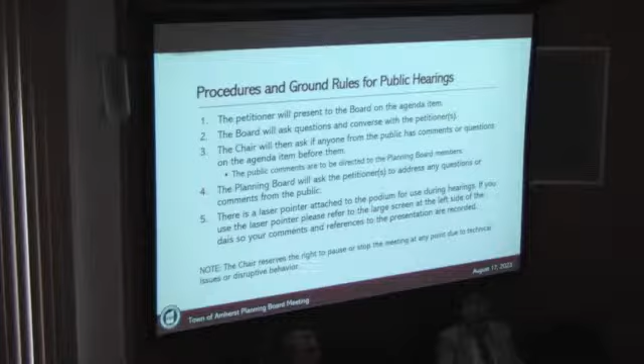I'll make one other comment. Apparently in a local newspaper a few weeks ago, there was a comment made that we had recommended a particular project. That was an incorrect statement. I believe they retracted it, probably on page 27 somewhere. That was not the truth—we have not recommended anything at this point for Costco. So just so everyone knows, that statement was incorrect.

That being said, we will go to item number 1. The first one is a site plan review for a proposed Tier 3 solar energy system, property located at 800 and 850 New Road. The petitioner, please.

Thank you for having us tonight. My name is Lee McIntyre, and I'm a project developer with SolSource Power. We've met before on a rezoning on this property. I'm going to go through a few points about the company and the project, and I'll shortly be joined by Mark Kenward, who you've also met, who's running a little behind.

SolSource is a New York-based company. We're female and veteran-owned, based out of Troy, New York. We develop solar farms all across New York, including community solar farms. I got my start in solar in 2014, I've lived in New York most of my life, and I work on projects across the state.

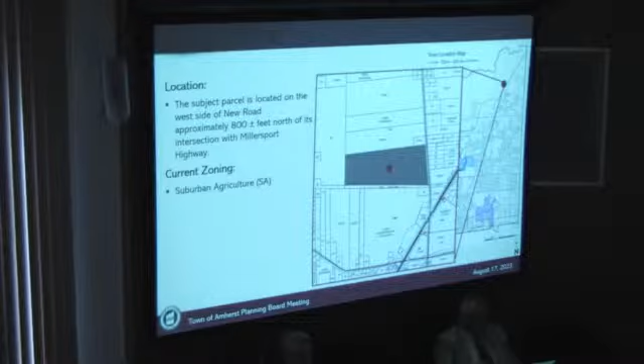This will be located on the west side of New Road across two parcels that will be merged. 850 and 800 New Road will be merged to accommodate about 30 acres of solar. We can go to the next slide.

There's no existing development on this site—it is vacant land. We provided the planning department with a tree survey on site, which showed that much of the trees on the site are dead or dying. They pose a risk to the solar, potentially falling on the panels or injuring people during construction of the array. So there are areas of the property where we do plan to remove trees.

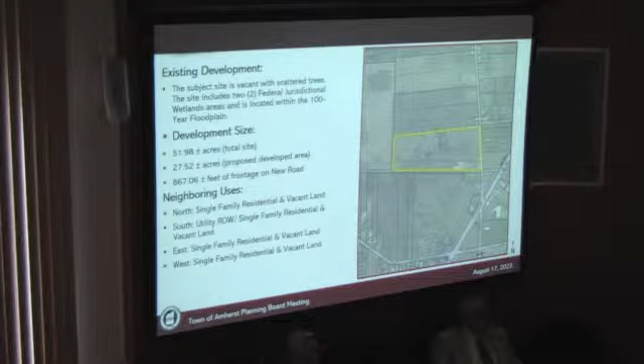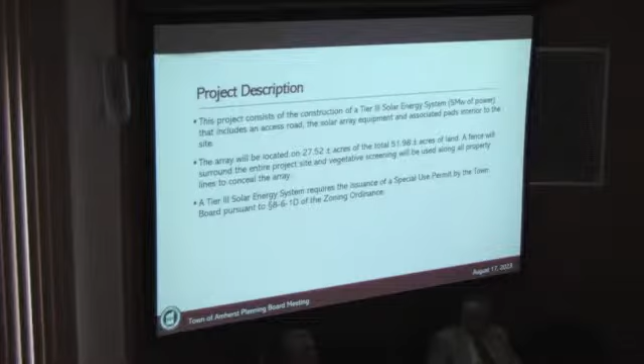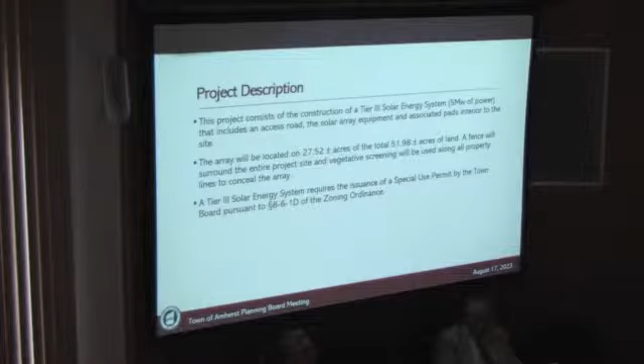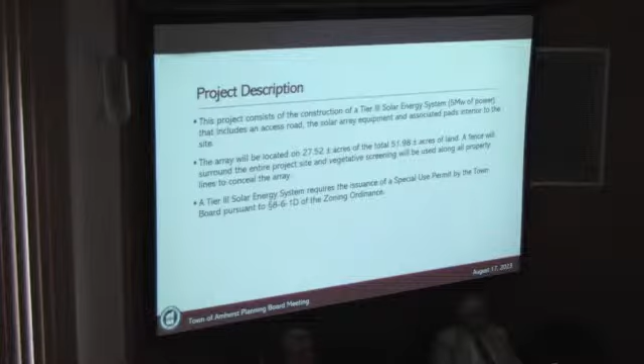So the project array is on just under 30 acres of solar. This is not productive farmland. We do plan to fence the entire array in for safety, and we also plan to lean into the agrivoltaic development of this project. What I mean by that is using the property for farming the sun, while also leaning into the agricultural importance of the property. So we plan to use sheep grazing to take care of the vegetation on site throughout the year. We are working with local sheep farmers, and there's actually an initiative across New York State to work with sheep farmers for this. There currently aren't enough sheep in New York to meet the demand of solar arrays, so they're currently working on breeding enough to meet that demand, but that is our intention to accommodate the co-location of agriculture on this property.

You can see there is a wetland in the middle of the site. The wetland is under the jurisdiction of the U.S. Army Corps. We plan to build around the wetland for the solar array to limit impacts on it.

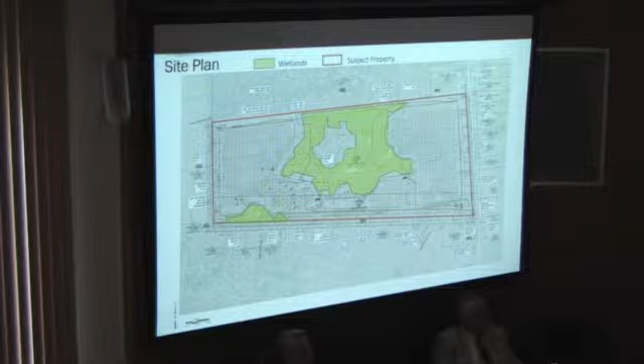This is a depiction of the property. At the front, there will be landscaping to block the view to the solar array. We worked with a local landscape architect on that, and we've submitted comments and worked with the planning department pretty extensively on those landscaping plans to really limit the visual impact of the solar array on New Road.

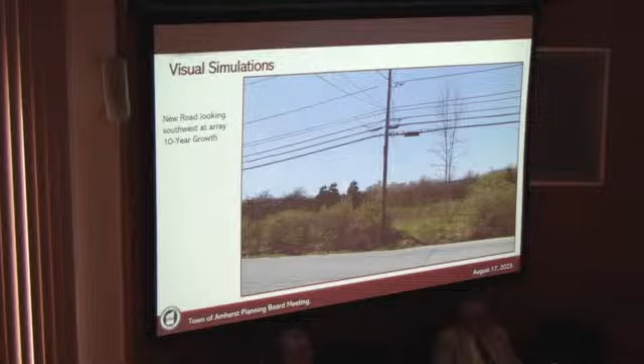We do plan to cut some growth on the property, but we plan to replace it with healthy growth. I think what you'll see in the tree study that was submitted is that there's a lot of unhealthy growth on the property that doesn't stand to last the test of time. A lot of the trees are expected to fall because they are not living. They also have a really low root system, and we do plan to replace those with the landscaping.

I'd like to welcome any questions from the planning board that I can answer.

There's someone who brought up that they had a concern because they will be living close to the solar farm, concerned about the kind of exposure that they and their families would have. Absolutely, that's a common question we get. The infrastructure we're using for this solar farm is the same electrical infrastructure used along the road currently, a 13 kilovolt line. That's the same service you get to any of the businesses across Amherst. There are some studies out there and potentially some evidence for higher voltage lines causing health effects. I don't know if those have been validated, but these are low voltage lines and not similar to that. So in terms of the electricity, there are no known health effects from this level of solar.

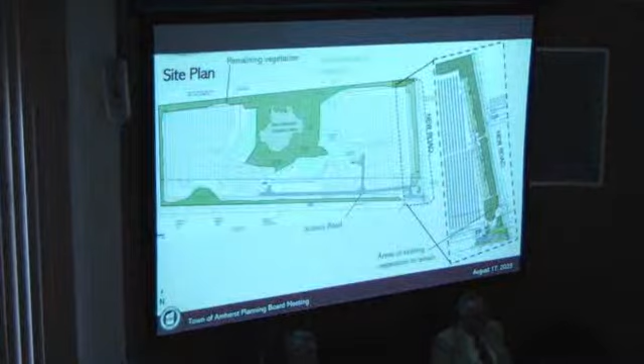You want to speak in the mic, please, so they can hear you in the back? As she said, the equipment pads here collect DC power, and they feed it to AC. It's converted to AC out here at the interconnection equipment pads, out at the front corner of the site here.

Did that fully answer your question, or did you have—what did you say, 13.8 kV or 13.2 kV? Yep. So that is still considerably less than a high voltage transmission line. Yes, the high voltage transmission lines range from 65 all the way up to 350 or so kV. Yep, so it's much lower.

That electricity and those transmission lines are stepped down throughout the grid to the 13 kV, which is the service that comes to the buildings here, the businesses and the homes.

Okay, thanks for that. One more question. You mentioned there are metals in the panel. Is cadmium one of them? Do you know the answer to that?

I think what she meant by metals is the metal framework for the panels themselves. They're built in a metal framework. I'm not aware of any cadmium in the solar panels themselves, but that's not to say there couldn't be trace amounts. I'm a civil engineer, not an electrical engineer, so I'm not familiar.

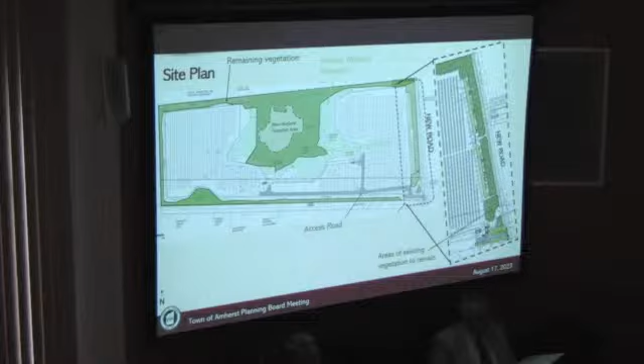Because some types of panels have cadmium, and there is a danger of that escaping in events like fires. I know in previous iterations of this technology there were components that may have been dangerous, and that was at least two decades ago. I know at this point the technology has changed, the formula for the silicon glass has changed, and there isn't anything that would pose a health risk, but I would certainly look it up and get back to you on the cadmium just to ensure that isn't in the panels.

Bob, how do we wait for that? What do you think we need to do? Should we wait? They're going to look into it and see if there's any cadmium.

Well, as we come to the point of making a decision on it, we can talk about those things. Put a condition, perhaps? Yes, we can make that. Sure. You're good? Thank you.

Good, yeah. All right. Does anybody wish to come and speak to this? All right, line up, please.

I live directly across the street from this proposal. It's Sally Blazinski from 905 New Road. I live directly across the street. My family and I have been there for over 30 years.

Nothing against new energy or ways to save the world, but I would like to know exactly how many feet this is from my property. My house is fairly close to the road. I've done considerable research since I received the notice of this meeting, which was my first — I didn't know about this until last week. I would like to know how many feet it is, because in my research it recommends considerable distance to reside away from these for health hazards.

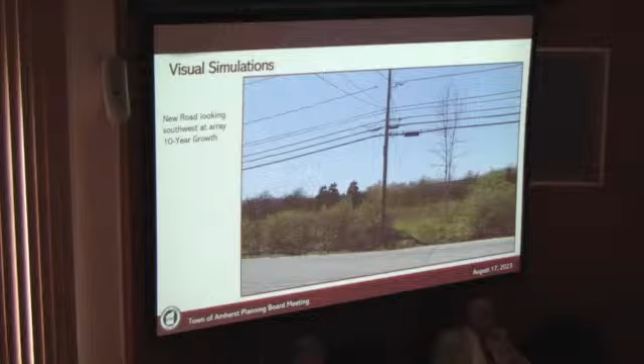Thank you. Hearing's closed. Next item.

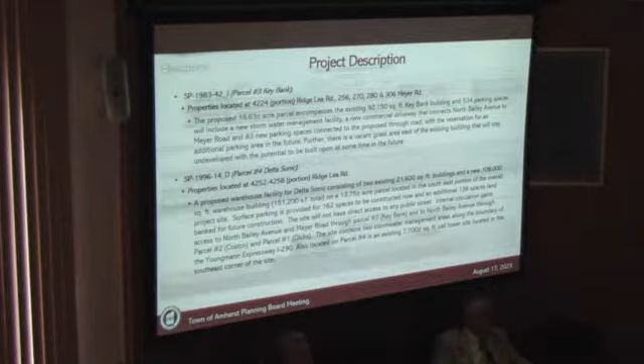A brief history here, because we've seen this project a number of times at the planning board. In June 2022, the town board rezoned a part of this site to GI and R&D. I'll walk through that in a minute. In January of 2023, they rezoned the remainder of the shopping center.

In February of 2023, we filed the site plan application. In June of 2023, we made a presentation to this board so you're aware of where we're going with it. We did submit a noise study and traffic study as part of this application. We have addressed all the comments we received as of yesterday in writing back to the planning department. We received one comment letter today from the town engineering department with 2 minor comments, which we will address as a condition of approval. So now moving ahead with the project.

You have Boulevard Consumer Square, which is one of the largest shopping centers in Western New York, to the west. You have what we call Amherst Development Park, which is an R&D zone piece of property with a mix of warehouses and offices. And then you have single-family residential remaining along Meyer.

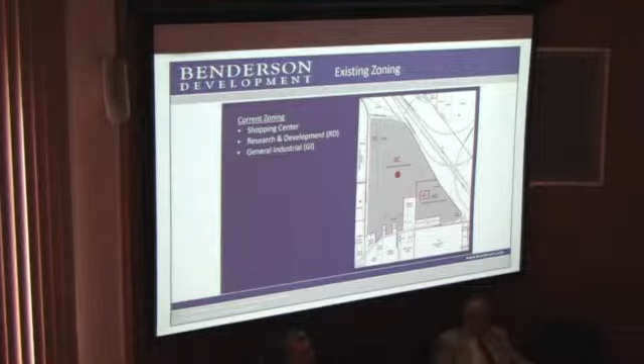On the current zoning, as I talked about, you can see the part of the property zoned shopping center here, and the part of the property zoned research and development in this area. One of the 20,000 square foot buildings is zoned general industrial, that's for a soap mixing facility for Delta Sonic. Next slide, please.

We are breaking the site into 4 lots. They're color-coded and called out here. Parcel 1 will be the Dick's House of Sports lot. Parcel 2 will be the Costco lot with their fueling facility. Parcel 3 will be the existing Key Bank building, its parking lot, and ancillary land, which are going to add to that lot. And then parcel 4 is the Delta Sonic Warehouse project. Next slide, please.

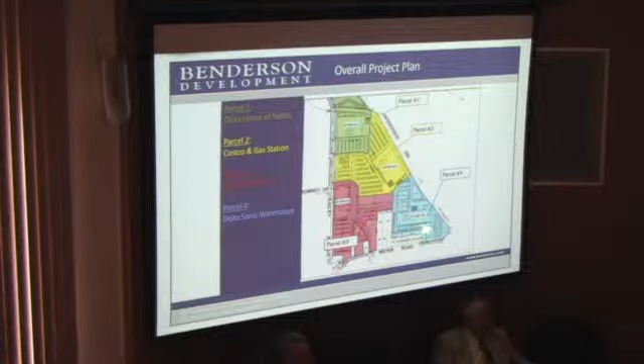This is a colored up plan of our project. I'm going to walk through it. As I noted, we're going to be demolishing 14 of the 17 buildings. The only 3 buildings to remain are the Key Bank and the 2 small warehouse buildings in gray. Those are about 130,000 square feet. In all, after we demolish and add, the site is only a positive 66,000 square feet. So if you take what we took off and what we add, we've only increased this site by 66,000 square feet of commercial development. So it's actually a much smaller increase than you would think by this plan.

Walking through the site, we're adding a 120,000 square foot Dick's House of Sports up to the north. This is the Ridge Lea extension. You can see the Dick's House of Sports. It has an 18,516 square foot outdoor sports facility area that's fenced in and enclosed. There are 349 parking stalls out in front, and it'll be an 8.2 acre parcel.

We're adding a 167,000 square foot Costco with a gas station out in front. The gas station will have 16 pumps and 32 fueling stations. It has one-way circulation and no access onto Bailey. So if you notice, it's green all the way across Bailey.

You'll access either through the 2 signalized driveways, come in the back, circle through and come right back out. All access is into the internal road system, so it creates no traffic on North Bailey. The Costco will have 774 parking spots in 3 main lots, one here, one south of the gas station, and one up in this area. It is on a 17.16 acre parcel.

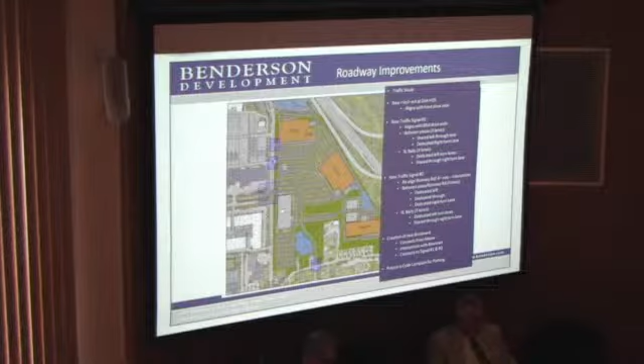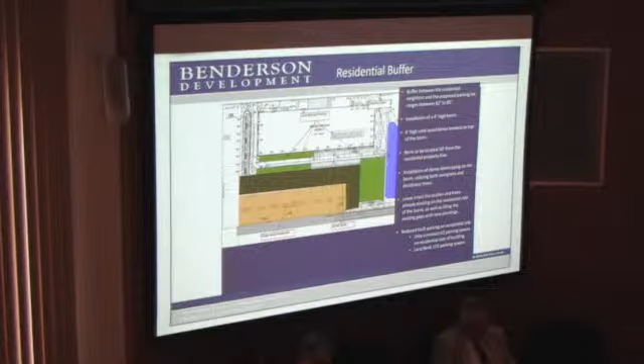I know this board is familiar with it, and the warehouse is attractive with no openings facing the neighbors. We did do a noise study, and there are no impacts related to noise as a result of this development. We're willing to take a condition, discussed with the planning department, to install the berm, fence, and landscaping prior to receiving a building permit for the warehouse. We do need to do the initial work because the dirt for the berm is coming from the warehouse site, so as we grade that site, the dirt will go into the berm. Prior to receiving a building permit, we've agreed to have the fence, landscaping, and berm built and up, so it will mitigate any impacts to the neighbors during construction.

That is basically the site. I know we've seen this project a lot. I'm happy to answer any questions the board has. Thank you. You're welcome.

Any questions? Just to make sure, is the applicant encouraging sidewalks to facilitate public transportation? We have worked with the planning department, and everything has pedestrian connections. We have installed sidewalks and even agreed to install potential sidewalks as future development comes online. All the pedestrian connections and crosswalks are there throughout the entire site.

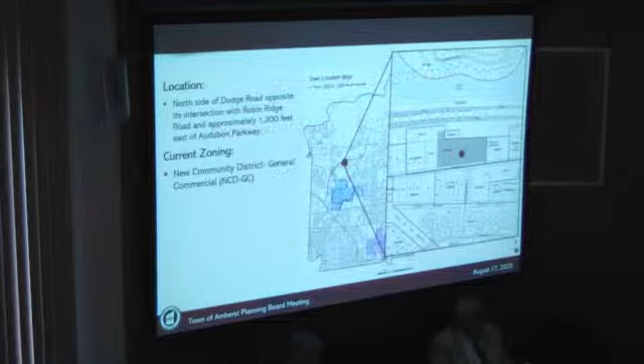Good evening, Chairman Gilmore and members of the Planning Board. Sean Hopkins of the law firm of Hopkins, Sorgi and McCarthy on behalf of the applicant, the Green Organization. Also with me is Pat Sheedy, the project engineer from Carmina Wood Morris, as well as Dave Sutton, the project architect from Sutton Architecture. The property we're presenting this evening is located at 480 Dodge Road. Which screen am I supposed to point at? All right, thank you - 480 Dodge Road, just to acclimate everyone, directly south of the I-990.

On the opposite side of the I-990 is the Muir Woods project. To the west is Audubon Parkway, to the south is Dodge Road, and we're also opposite Robin Ridge Road. It's important to note that this site is properly zoned New Community District General Commercial, NCDGC, and that zoning has been in place for approximately 50 years now.

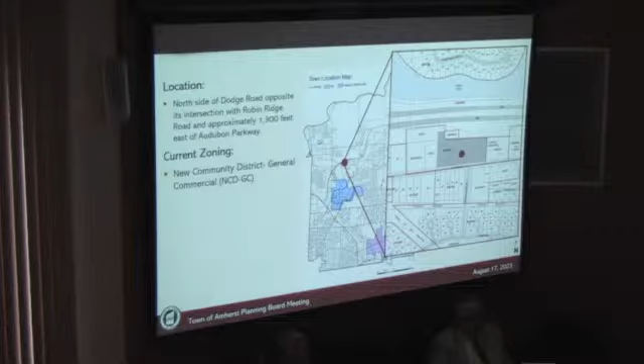And I'm not going anywhere. This is an aerial photograph. It's important to note that previously this site was the location of Arbordale Nursery - I think we probably all know that very well. There are various older and outdated structures on this site, and that use has been in existence since, I believe, 1970. Prior to that, it had been utilized primarily for agricultural purposes.

The site itself is slightly more than 5 acres in size, and there's various uses in the immediate vicinity. It's important to note and acknowledge that there are single-family homes located in near proximity, including those directly on the opposite side, the southern side of Dodge Road.

What we're proposing, based on modifications made since originally filing the site plan application back in April, is a total of 116 apartments for lease, consisting of 2 four-story apartment buildings located at the back portion of the site, directly adjacent to the I-990 right-of-way, and 5 two-story townhome buildings consisting of 4 units each along the Dodge Road frontage.

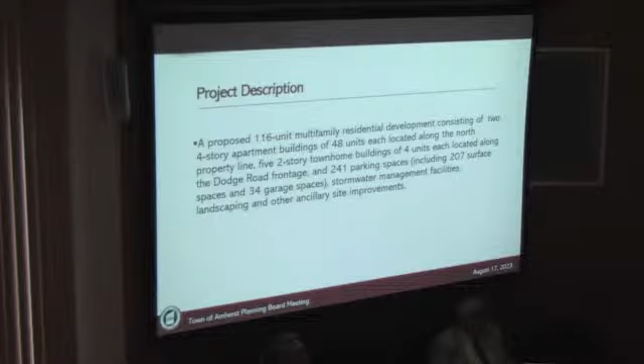Total of 241 parking spaces, including 34 garage spaces, and a whole assortment of related required improvements. This is a copy of the most recent site plan.

The buildings here in purple are the 2 four-story buildings. We'll show you some color renderings. The stormwater management area will be located on the northwest portion of the site.

In light of the fact that we have single-family homes located directly across the street on Dodge Road, we're proposing a series of 2-story, 4-unit townhome buildings. The renderings and layout reflect some input we received from the planning department. We also have a clubhouse as well as a relatively small dog park area located here.

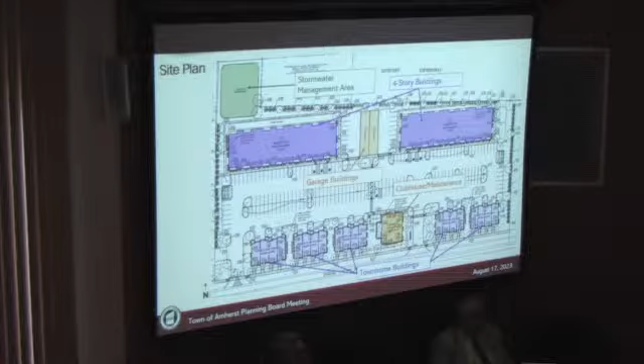We're going to concentrate on providing a seamless transition between the uses across the site, the townhomes, and getting higher density as we get to the back of the site adjacent to the I-990. These are the renderings prepared by Dave Sutton of Sutton Architecture.

These would be the 2-story, 4-unit townhomes located along Dodge Road. It's important to note the planning department asked us to make some changes and may have additional comments as a condition, including walk-up porches and bringing in different materials. We're quite proud of the look we're now presenting for these townhomes that will be located directly opposite the single-family homes.

These are the 2 four-story multifamily buildings that will be located on the back portion of the site. The peak height is 45 feet. The reason that peak height is not as high as it typically would be for a 4-story building is because we're utilizing flat roofs. By way of comparison, properties located in the town's residential 3 zoning district would have a maximum height of 35 feet.

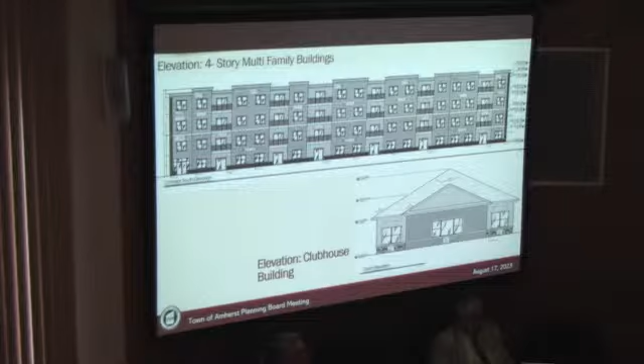You can also see the clubhouse elevation on the bottom right. I think we've already depicted where we are. I've already mentioned that we're properly zoned and have been in place for approximately 50 years.

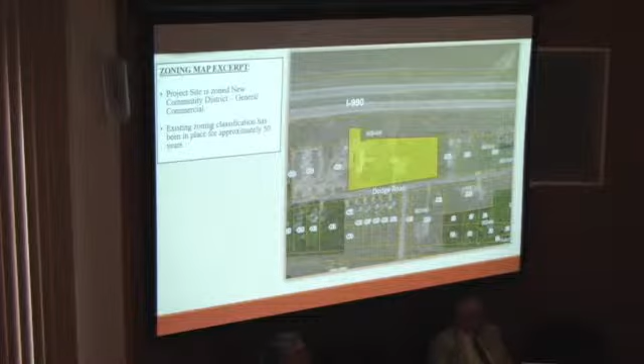Based on input received during an informational meeting held with nearby residents in late May, as well as input from the town as part of the review process, we eliminated the 5th floor, so we're now down to 4 stories. We also took what was previously this larger dog park area...

...and infilled that with an additional 2-story, 4-unit townhome building. The reason we did that is we think that's the best perspective if you live on the opposite side of Dodge Road, rather than having this giant gap where you can see through to the back.

It's important to note the setback of those 4-story, previously 5-story buildings, from Dodge Road is 200 feet, approximately 2/3 of a football field. We've done our best to push those as far north as possible.

We are showing one full access curb cut and a right-in, right-out curb cut based on input received as part of the review process. I'd also note that the Erie County Department of Public Works, as well as the town, has asked for a possible pedestrian beacon crossing here. The town's asked for it, and it requires Erie County approval. We're fine doing that so long as it's approved by the Erie County Department of Public Works. That is a county road.

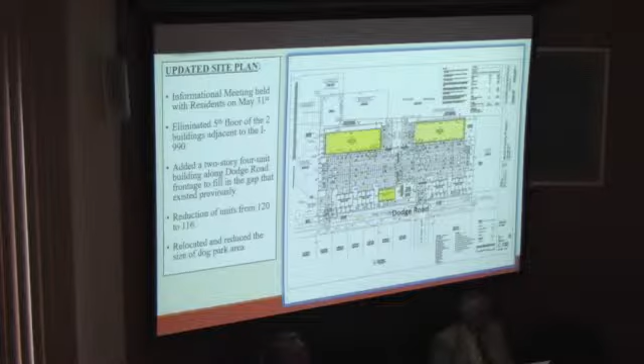This is the copy of the updated site plan, with the infilling of that additional 2-story, 4-unit building, modifying the originally proposed 5-story and 4-story buildings to 4-story only, and changing the configuration and location of both the clubhouse and the dog park area. The dog park area in particular has been made much, much smaller.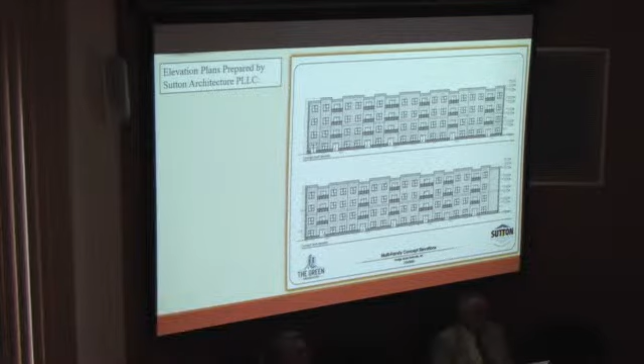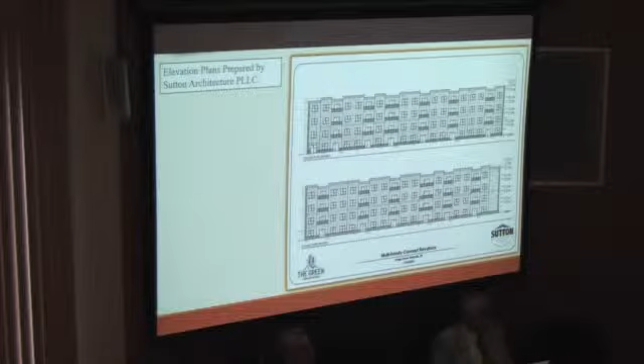These are copies of the elevation plans prepared by Sutton Architecture, updated compared to the original application filed in April. These are the 4-story buildings, and as I indicated, the height to the peak is 45 feet, the height to the main facade is 43 feet. They show a diverse range of materials as well as vertical and horizontal relief, meaning we're not just proposing a rectangular box.

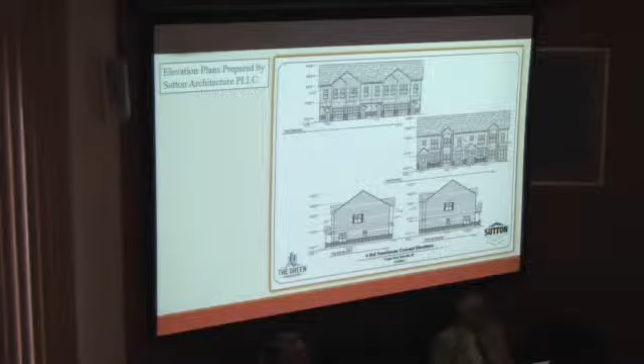Oops, sorry. It will literally be those front facades with the steps, having more of that brownstone appearance.

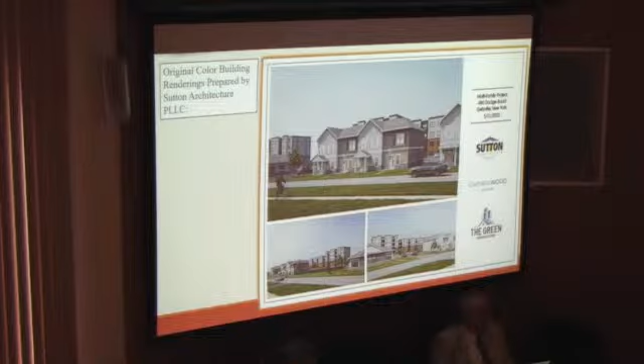This is the original color rendering, just by way of comparison. Those were the townhomes we originally proposed, and as I indicated, the planning department really did push aggressively to improve those. The planning department, working with Dave, has done that. Whether there'll be some additional minor refinements, we're certainly open to that. You can see that's the updated rendering for the townhomes.

This is a perspective of the townhomes looking back to the 4-story buildings, again with that being 200 feet back from the Dodge Road right-of-way. It's a perspective looking more to the northwest, and you can see that small dog park area.

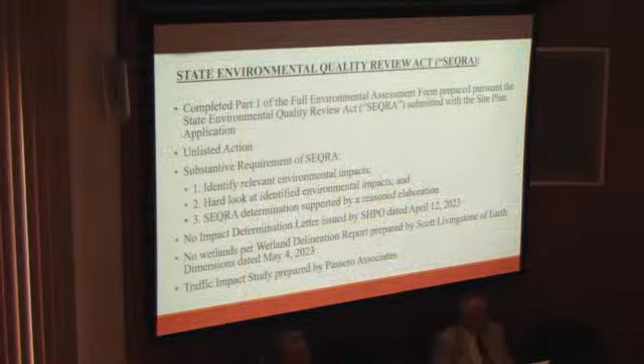In addition to the request for site plan approval, this requires an environmental determination pursuant to the State Environmental Quality Review Act. Over the course of the past four-plus months, we've provided very extensive documentation that clearly demonstrates this project will not result in any potentially significant adverse environmental impacts. It's hundreds and hundreds of pages of reports and studies.

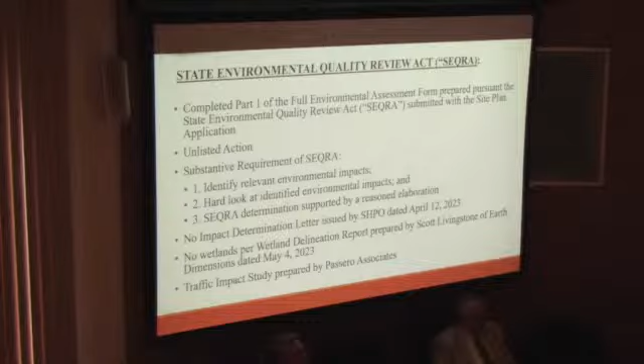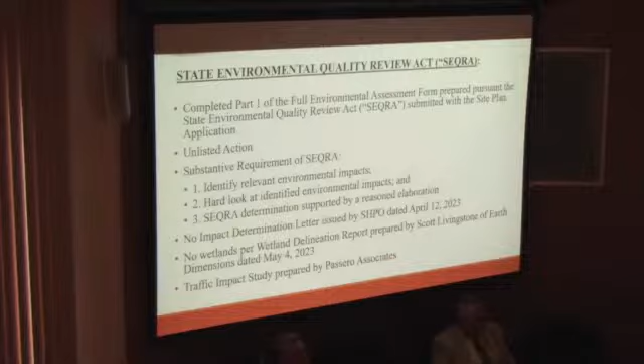To summarize, that includes a no-impact determination letter issued by the New York State Office of Parks, Recreation, and Historic Preservation. There are no wetlands per the wetland delineation report prepared by Earth Dimensions dated May 4th, 2023. We've also provided an updated traffic impact study prepared by Passero Associates in late July.

That traffic impact study had very detailed findings, but basically to summarize, it concluded that the project will not result in any potentially significant adverse traffic impacts. Now, that shouldn't be meant to suggest the project will not have traffic impacts — obviously it will — but taking a look at the roadways in that vicinity, including both the intersections at John James Audubon Parkway and Dodge Road, as well as Dodge Road and Campbell, the analysis was that it does not have any significant adverse traffic impacts.

That traffic impact study has been reviewed and approved by the town's Traffic Safety Board per a memorandum issued by Chris Schragle, the Traffic Safety Coordinator, dated August 10th.

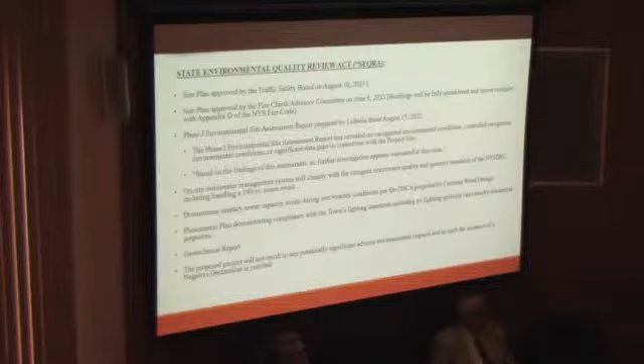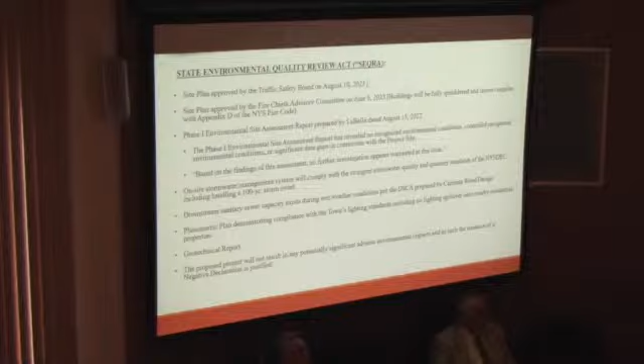Additional environmental documentation includes a Phase 1 prepared by Labella, dated August 15th, 2022. That document is very important because this formerly was a nursery, and there was a potential for contamination. The Phase 1 confirms that no contamination has been encountered to date.

The on-site stormwater management system will comply with the very stringent stormwater quality and quantity standards of both the DEC and the town of Amherst. If there are any questions about that, Pat can answer them. We've confirmed there is adequate downstream sanitary sewer capacity during wet weather conditions, which is a rainfall event of half an inch or more. We've talked about the photometric plan, and we also provided a geotechnical report.

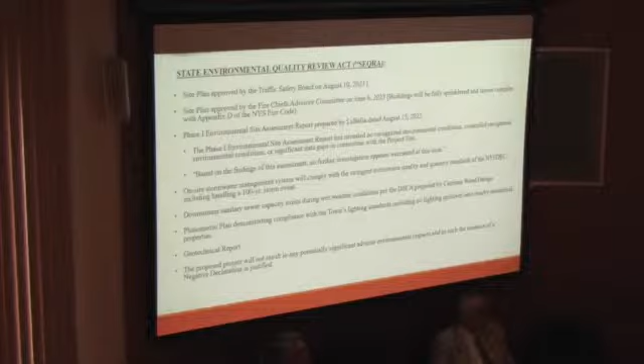In conclusion, we think it's quite clear the only appropriate SEQRA determination with respect to this particular project would be the issuance of a negative declaration.

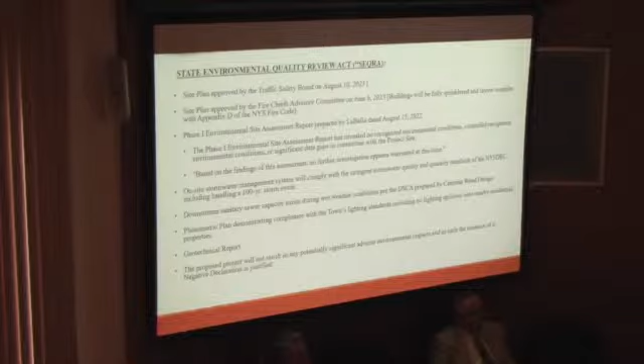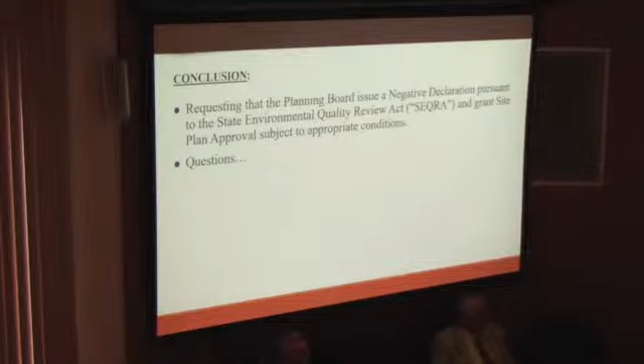So with all that being said, what we're asking you to do this evening is two things: issue a negative declaration pursuant to the State Environmental Quality Review Act, and then approve the site plan as modified very substantially, subject to appropriate conditions. If there's any questions about the history of this project, the substantial modifications made to date, or the requested approvals, either myself, Pat, or Dave would welcome the opportunity to address them.

Thank you. Thank you, Mr. Hopkins. Brittany, I'll go to you first.

Questions? I appreciate the reduction of the four-story building, but where else, just considering neighborhood consistency, is there a four-story building along Dodge? I don't believe in that particular segment of Dodge Road, which I would define from John James Audubon Parkway to Campbell, there is any other examples of four-story buildings.

But I do want to note, and I think this is an important point as well, the site expressly permits much taller buildings. And again, that zoning classification cannot really come as a surprise to anyone. It's been there for 5 decades plus.

Thank you. Michael? No questions. Barb? No questions. Carrie? Anybody from the public? If so, please line up. State your name and your address.

Tammy Coythan, 441 Dodge Road. You have all my letters and all of my photos. I've got more, I've got them again. I would just like to address a few things he said.

So yes, it was a nursery. Before that, it was a landscaping company, who knows what was being used. But this project is just way too big for our little road. It takes us 10 minutes to get out of the driveway during peak time, and the traffic backs up from Campbell all the way past my house.

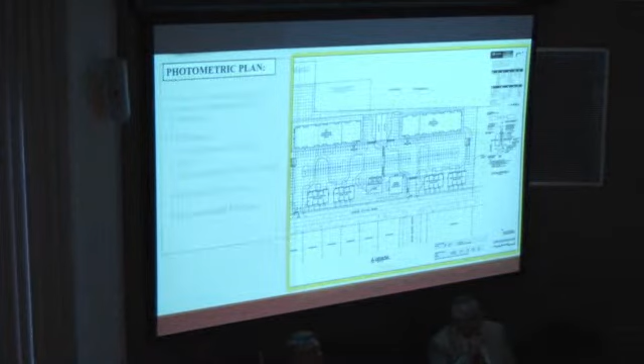In terms of drainage, and drainage is always a difficult topic—do you want to go back to the plan? Because it's not easy to understand. Today, on this undeveloped, or partially developed site, there is no stormwater management system, so water goes where water goes. Under its developed condition, and Pat Sheedy prepared the plans, we are required to provide a stormwater management system.

What we're showing is a dry pond on the northwest portion of the site that will retain water during a 100-year storm event and ensure there's no additional increase during a rain event. We've demonstrated that, and it's been reviewed and approved by the engineering department.

It's also important to note that Amherst has been fairly proactive, and nowadays, versus 10, 20, 30 years ago, all developers are required to sign a stormwater management agreement. It states that the developer is responsible to maintain the system, and it's recorded at the Erie County Clerk's office. If they fail to maintain it, the town can exercise remedies, including rectifying the situation and assessing the cost onto the tax bill. The Green Organization owns numerous multifamily projects in Western New York with an excellent track record, so rest assured the stormwater management system will be properly maintained.

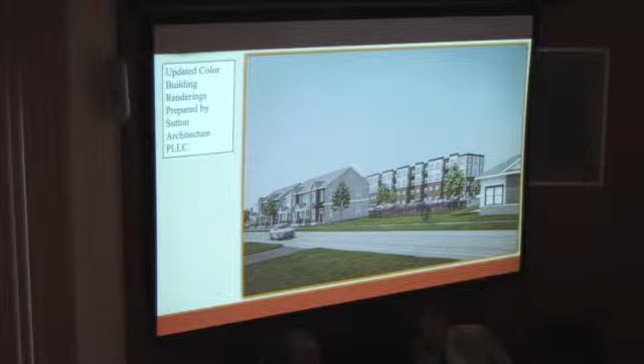In terms of traffic, I want to be clear—I don't live in that neighborhood, and I can't say the project will generate no traffic. The key inquiry is whether it will generate a significant amount. By comparison, Dodge Road currently has 6,700 vehicular trips per day, Audubon Parkway has 7,806, and Campbell has 7,895. During the AM peak hour, 7 to 9 a.m., the project will generate 14 trips entering and 44 exiting. During the PM peak hour, it's 44 entering and 26 exiting. That does change the situation a little, but it's simply not significant—that's not just our opinion, it's the opinion of our traffic engineer, backed by the review and approval of the Traffic Safety Board.

I think those are the comments that have been asked. If there's anything else I missed—

Mr. Hopkins, when was that traffic study done? That traffic study was based on counts taken in 2020, 2021, and 2022, and was most recently updated by Passero Associates on July 27th of this year.

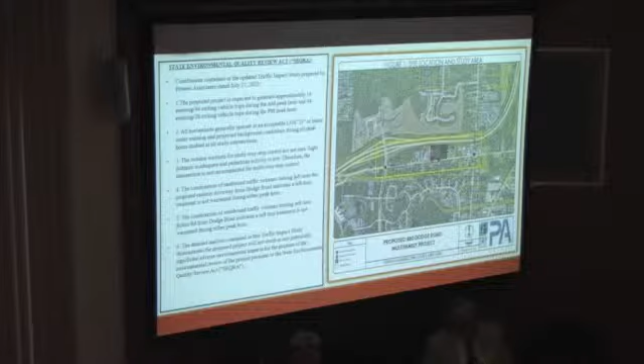All right, next item, item number 7. This is a site plan review for a proposed Dana Heights Playground, Park Playground, property located at 79 Shetland Drive.

Good evening, my name—oh sorry, I'll wait. We'll let them walk out for a minute. Oh wait, she wants to be on... I'm good, I'm kidding, I'm good. Give it a second here. I didn't want to, so we can pay attention to your project. Thank you.

Good evening, my name is Leanne Voigt. I'm a senior planner with Wendel Companies, here to present to you tonight on behalf of the Town of Amherst, the Dana Heights Playground Project.

The Dana Heights Playground is located on the south side of Shetland Drive, approximately 500 feet east of Fruitwood Terrace and Shetland Drive. It is in an existing neighborhood on the north side of Sheridan Drive, currently zoned recreation conservation. The existing development is only 0.64 acres of property—a neighborhood park with a small playground and some trees, surrounded by single-family and multifamily residential.

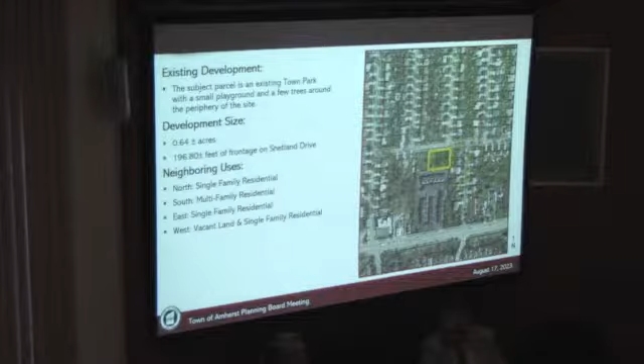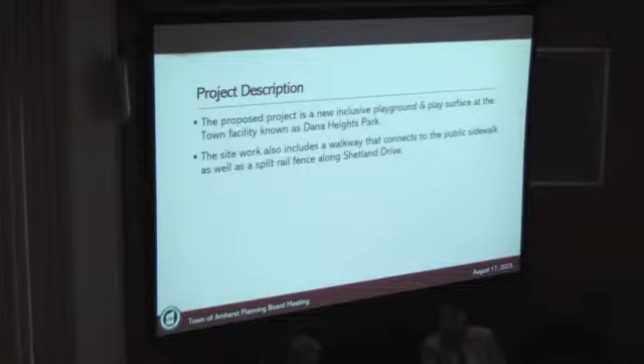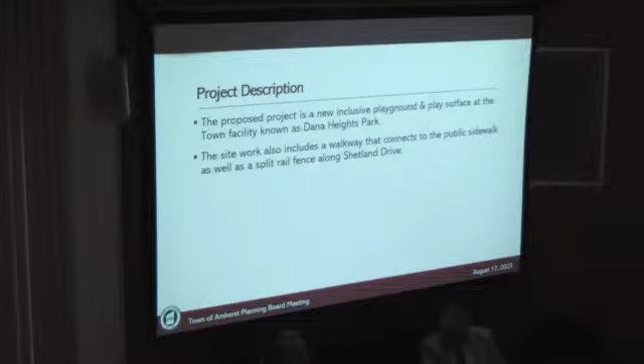The proposed project is a new inclusive playground that would make it accessible for all. The Recreation Department has been working with the renowned park design group Parkitects, and Wendel was brought in to help design the additional site work required. This site work, shown on the site plan, includes a walkway and some landscaping improvements.

So to get into some of the details of this project: this is Shetland Drive, and this is the proposed playground. The existing playground is approximately in this area. With the size of this accessible playground, the hope is to really provide a great amenity for the neighborhood and a new play space.

There is a grade change of 4 to 5 feet from Shetland Drive to the playground location, which is very difficult to navigate in a wheelchair or other assisted device. So the sidewalk had to be sloped and curved to get an appropriate grade for wheelchair access. That's also why the playground site is pushed a bit further south than the existing one. The dark green areas are new trees being proposed, and the light green are existing trees that will remain.

So this was submitted, and all town departments have provided us with their comments, and we've responded to them.

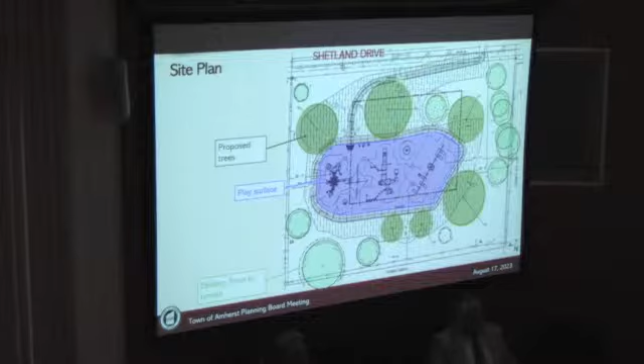We received variances two nights ago for the setback, for all the reasons I just explained, to give them an ADA accessible pathway. We also received variances for the required buffers set between structures and surrounding residential neighborhoods, due to us keeping existing trees and adding some additional trees.

Here is an image of what it will look like, a rendering. Again, this playground equipment was selected by the town's recreation department to better serve the community. This evening, we're here asking you for site plan approval.

Thank you. Brittany, any questions? No questions. Michael? No questions. Del? No questions. Harb? No questions. Carrie, anybody in the audience wish to ask questions on this? Seeing none, hearing's closed.

Next item, item number 8, please. All right, SEQR review for a proposed preliminary plat, proposed 26-lot subdivision, Ashley Green, property located at 10060 Transit Road.

Good evening, my name is Ken Zouch. I'm with the engineering firm GPI here tonight on behalf of DJC Land, the project applicant. What we're requesting tonight is a review of the SEQR for a 26-lot subdivision called Ashley Green.

This is part of an overall property that the developer owns that extends out to Transit Road. The portion we're looking at tonight is just the western half, the 26 lots, as you can see right up against Smith Road there. Next slide.

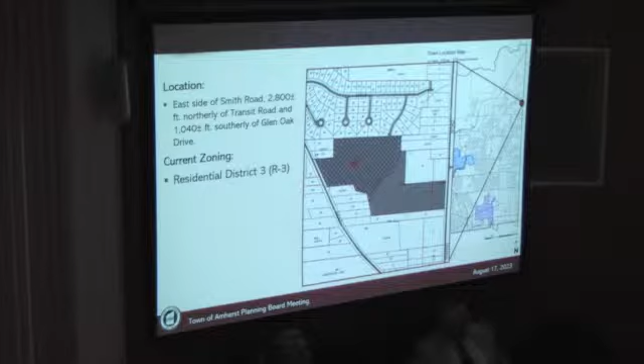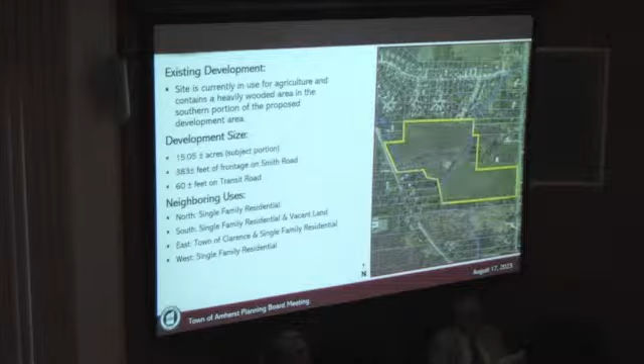The existing development is immediately south of an existing residential development, also R3, so we're basically matching that in. We're extending Ruby Lane and connecting out to Smith Road, very similar in nature to the surrounding development.

Next, you can just skip over these next couple here. We'll just go to, yes.

So just to start, this project did have to receive a rezoning. It received a rezoning back in 2021. This board had actually reviewed the rezoning and recommended approval of it. The town board also approved the rezoning to R3, and at that time also issued a SEQR negative declaration. So this is something that's already been somewhat vetted as we come through here.

I'll go through each of the environmental impacts, at least a broader category. The subdivision portion you can see on the west side, again, was part of a larger development. At the time we came to this board, however, the project was even larger than what we have tonight.

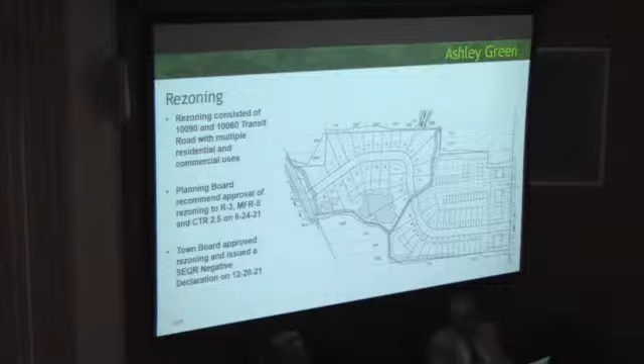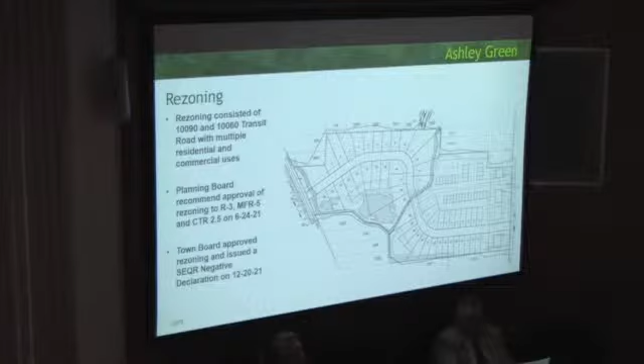We're keeping the same 26 lots for the R3 portion on the west side. We've taken some of the townhomes from 190 and moved them down into our property, which used to be more of the smaller patio-style lots, so those will now be townhomes. In the frontage along Transit Road, CTR 2.5 still remains the same, although of course there are not as many mixed-use buildings at this time.

The subdivision itself is 26 lots on about 13.8 acres. We include a Smith Road connection as well as a Ruby Lane connection. This Ruby Lane connection was at the recommendation of the planning department, fire safety, as well as traffic safety.

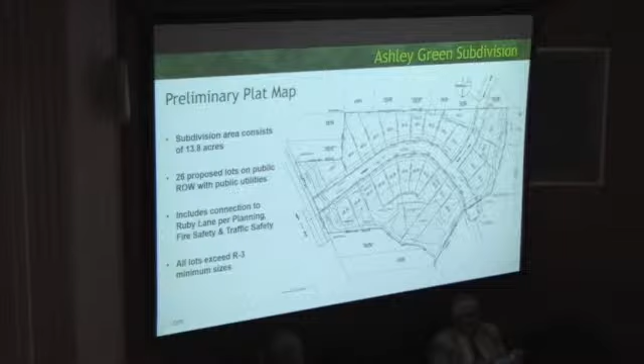We originally came in with a concept plan that did not include that connection. At the recommendation of the town, that was included. That will be a full vehicular connection, as well as a sidewalk connection, and we would be removing the temporary turnaround located at the end of that street. All of our lots meet and exceed the minimum R3 standards as proposed.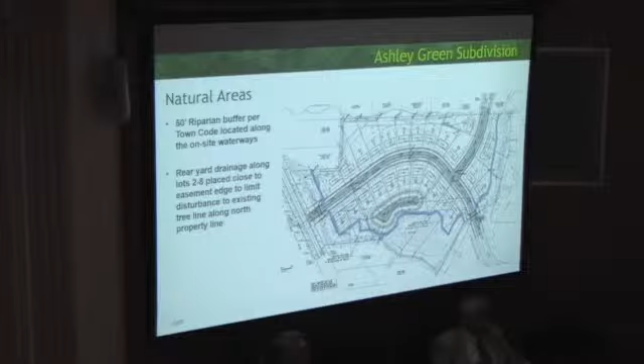Some of the environmental impacts we look at, as part of the town requirement, require a 50-foot riparian buffer. This applies to the water courses that run through the site along the town ditch, which is along the eastern portion of the subdivision, then south, and then actually flows north along Smith Road. You can see that line highlighted in blue. That would essentially be a buffer where no disturbance would occur beyond that.

As you can see, we've also taken a look. This project's largely going to be developed on a former agricultural field. We're not really disturbing much in the way of woodland areas or trees. You can see the red line is the southern boundary we have, and that's where the buffer limits of disturbance are. So we're really mostly dealing with previously disturbed soils.

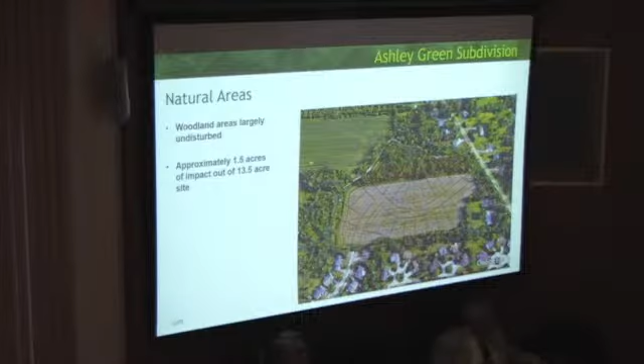I do want to note on the bottom side here, which is actually the north, there is a tree line between our development and the adjacent development. We've tried to take that into account. We have a 15-foot drainage easement, a rear yard drainage easement proposed along that property line. However, we've placed our proposed drainage line as close as we can to the street side, in an attempt to preserve as many of those trees as possible, to keep that natural buffer between our development and those existing residents to the north.

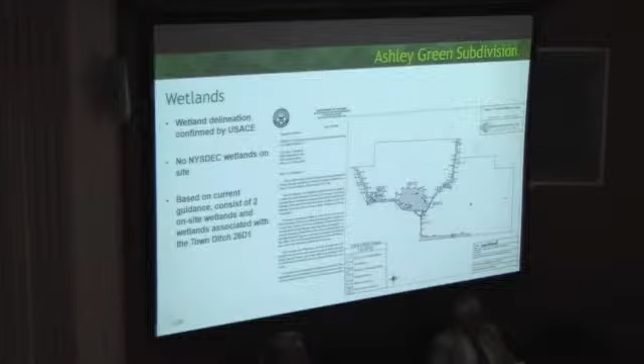Wetlands for this project have been reviewed. There are no New York State DEC jurisdictional wetlands on this property. There are U.S. Army Corps of Engineers federally jurisdictional wetlands. They include the water courses on the property as well as 2 wetlands on site. We have minimal disturbance proposed for those.

If you go to the next slide, we're looking at approximately 0.1 acres. Now, the Corps of Engineers may be offering new guidance in September, so we don't know for sure if these 2 wetlands will remain under their jurisdiction or will be removed ultimately. Either way, we're not planning on changing the plan. If they do get removed, that'll still remain as essentially preservation area, and we are only looking at very minimal impacts considering the size of the site being 14 acres. We've done as much avoidance as we can for this site.

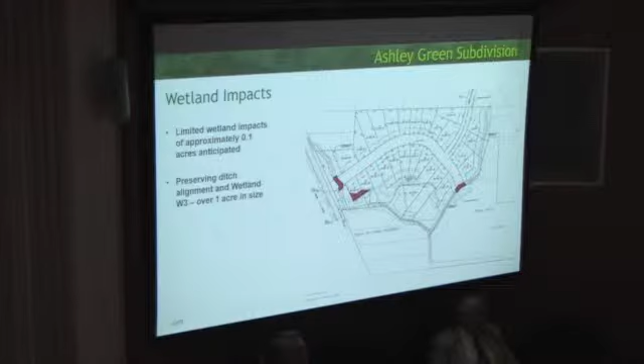There's floodplain on the property associated with the town ditch. This is not floodway, so we are allowed to go in and fill portions of the floodplain. This will be done through the LOMR-F process, where we essentially fill the lots before the homes are built, run it through the town, and then up to FEMA for their approval.

As part of this study, during the rezoning, the town had asked us to take a look at the impacts of our 2 proposed crossings of the ditches and see how they impact our property as well as beyond. We performed an extensive hydraulic analysis. The results indicated that only within the project vicinity would there be an increase of about a quarter of an inch to the floodplain level. So really minimal—it's only in the area of our development.

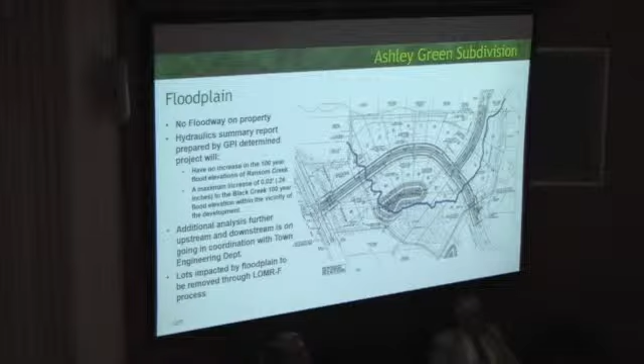The town has asked that we extend that out a little bit further, so we are currently working with the engineering department and coordinating with them in terms of the extent beyond our site as well as out towards Transit Road and further downstream, to make sure there are no further impacts or impediments that would cause an unnecessary rise in the floodplain elevation impacting those other lots. We don't believe there will be, given our current analysis and limits of only a quarter of an inch. But nonetheless, we will continue to work with the engineering department on that to make sure everyone in the town is satisfied before we go in for preliminary plat approval.

A traffic study was performed on this site, and that encompassed the entire development, again, not just a 26-lot subdivision. At the time the study was done, it also included 190 Transit Road, so it was a larger development. The study was performed in January 2021, and there was an update this past June to remove the portions that were no longer going to be developed.

We analyzed the intersections identified here, going all the way out to Millersport Highway and down Transit Road, as well as the town's request that we look at cut-through traffic with the installation of the connection to Ruby Lane, as well as between Transit and Smith Road. That was analyzed as well, reviewed and approved by the Traffic Safety Committee. Ultimately, there were no significant impacts to the project or to the surrounding roads. And of course, with the pullback of our development footprint, we've reduced those impacts even further than they originally were.

We understand, of course, that as this project moves forward, beyond the subdivision, we will have to work with the DOT. They've been provided a copy of the study, and we know we'll have to get a permit from them to connect to Transit Road when that time comes. Additionally, part of the traffic study looked at sight lines at the intersections. There are no issues with the proposed sight distances or stopping sight distances as you approach the intersection, so we know it would be a safe intersection located there.

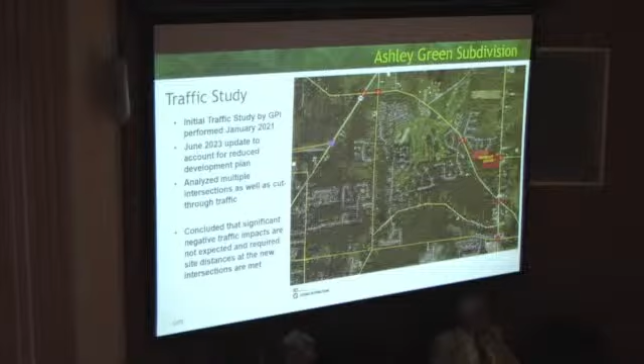And with that, we're asking that the planning board issue a negative declaration, just like they had for the rezoning for this project, and we can answer any questions that the board may have.

Thank you. Brittany, any questions? No. Michael? No questions. Dell? No questions. Barb? No questions. Anybody in the public, in the audience, wish to get up and speak, please?

Hi, my name is Chris Bogdan. I'm representing Ransom Oaks Community Corporation. Could you repeat one more time? We didn't hear that, sorry. Chris Bogdan. I live on Glen Oak Drive. I'm also representing the board of directors for Ransom Oaks Community Corporation.

So I've been fielding a number of concerns from my residents on this development, and I'll go backwards in order of importance. The first is you're now going to have a development in a lot of people's backyards that was not previously there, that doesn't have to conform to our declarations, which I understand may not be a reason to stop the development. The second is floodplain concerns.

Obviously, people know that our neighborhood has had extensive issues with flooding, and I don't believe that enough attention has been paid to that in the past, so everyone in the neighborhood is very elevated on their concerns of that situation. The south side of the neighborhood tends to flood quite frequently. There's been a number of improvements that have stopped that from happening, but even as early as 5-6 years ago, we were having floods crossing over the streets.

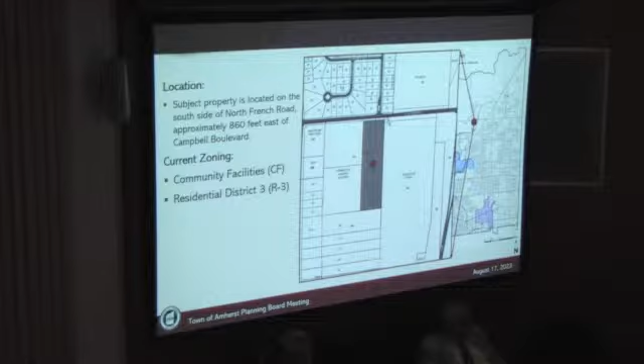Petitioners own 2 properties off North French Road: 1635 North French, the smaller one carved out here, and 1639, 1641 North French. 1635 is zoned R3, and 1641 is zoned CF, community facilities. Common ownership, common borders, but disparate zoning and disparate uses on the properties. Currently at 1641 North French is the Greater Buffalo Gymnastics Center, a daycare center, and a dance studio, all children and neighborhood focused commercial destinations. This blends well with the residential neighborhood to the north, other residential neighborhoods to the west along Campbell, and the soccer complex to the east.

There is no neighborhood shop, neighborhood eatery, or other destination where you could go after a soccer game, after dance, or grab a bite to eat without getting in your car. So at 1635 North French, petitioners are proposing a

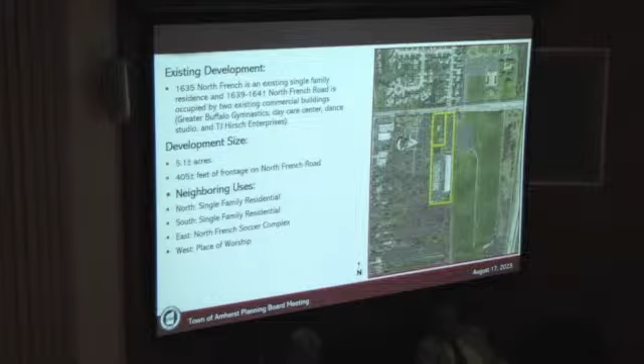To further tie the properties together, they're also looking to interconnect them via a roadway. The proposal for 1635 constitutes a mixed-use development that's not currently permitted at 1635 North French, so we have to rezone the property to neighborhood business. Before we can even do that, we have to address the comprehensive plan.

Comprehensive plan figure 6 labels both of these properties as single-family residential. That classification certainly isn't true for 1641, which already has commercial development on it. To bring the redevelopment of 1635 closer to reality, we need to also reclassify it on the map and therefore amend the comprehensive plan.

So that's what the request is before you: to amend figure 6 to redesignate both of these properties as commercial/mixed use, one, because 1641 already is that, and to help bring 1635 closer to reality.

One thing to make clear, I saw this in the notice, and there was a Buffalo News article about this project earlier. Figure 6 is the town's conceptual land use plan. I think the board knows this, but it's more for the record. Figure 6 is not the zoning map. We're not seeking a rezoning by any means. In requesting this amendment, we just need the map to match what's already there and match what 1635 could be used for, which is our proposal, a commercial and mixed use development.

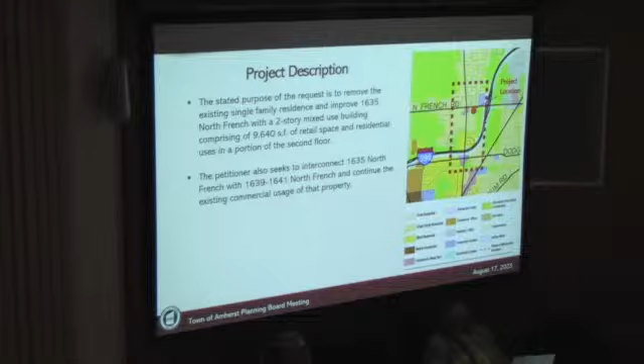We submitted the application for this request for relief June 20th of this year, and since that time, many of the town departments have already reviewed and commented positively on this proposal. Most specifically, the Long Range Planning Committee and the Planning Department both agreed with the analysis that was submitted in support of the amendment request.

Generally, what that analysis does is speak to how this neighborhood-focused development complements adjacent uses, enhances neighborhood connectivity and community life, and fits well within the existing scale of this commercial corridor. I think what Tori and TJ have done is found a sweet spot between expanding commercial centers, expanding suburban corridors, which are goals of the comprehensive plan, but doing so in a way that still fits within the neighborhood.

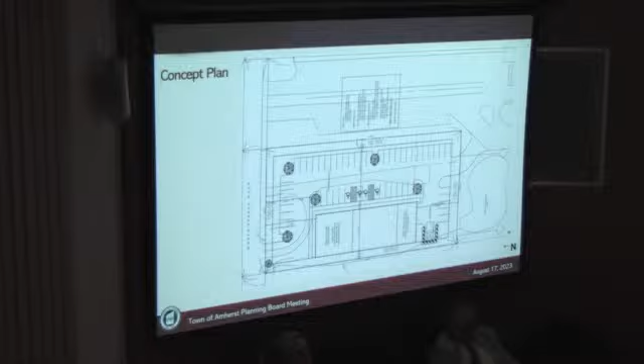So with that, we're looking for your recommendation of approval. We're here to answer any questions of the board and the public, and thank you for your time.

Yes, I do have a question. Regarding zoning, do you plan to be coming back, we need a zoning change? We would need that, yes. For 1635, if this board sees it to recommend to the town board to adopt the comprehensive plan amendment, and the town board then adopts that amendment, that would open the door for us to come back for a rezoning.

Okay, realizing this is a concept plan at this time, do you have an idea of how many residential units you're thinking of on the second floor? One.

Okay, thank you. Carrie, anything? Anybody out there want to speak on this? Seeing none? Hearing's closed. Thank you.